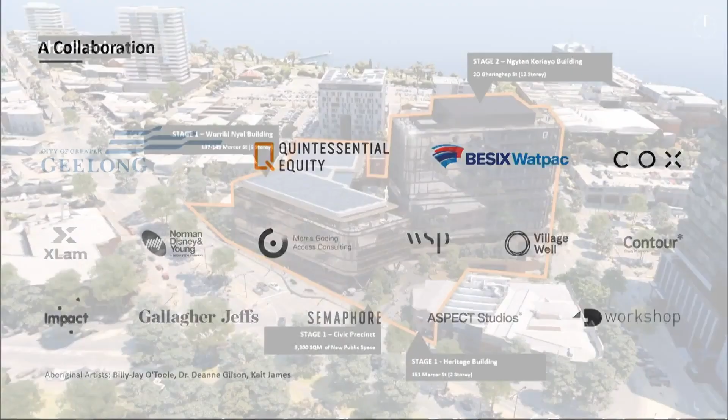The precinct is a collection of 3 buildings and public space in between. We have a 2-storey heritage building restored to its original footprint. We have the Wurriki Nyal building, which is 6 storeys that houses the council offices, and a 12-storey commercial building which frames the precinct and addresses some of the neighbouring developments to the north.

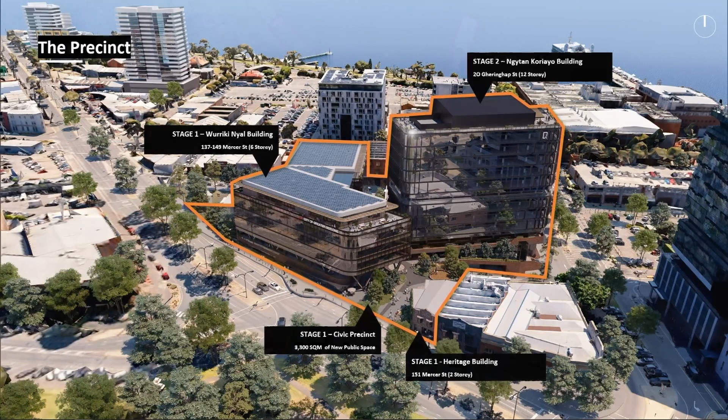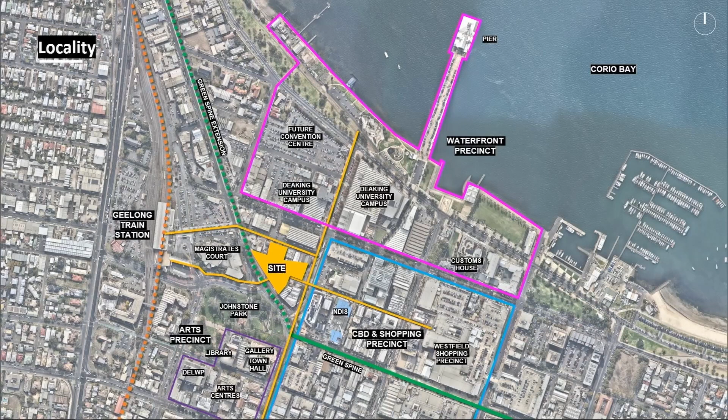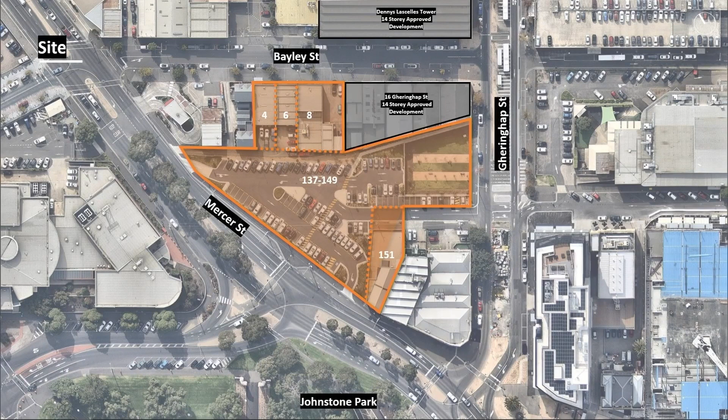The site is located in central Geelong, connecting the train station with the northern waterfront precinct, the eastern CBD shopping precinct, and southern arts precinct. The site has an awkward geometry, both in plan and in section, with 137 the original competition site, with 4, 6 and 8 added to allow a connection to the north to Bayley Street, and 151 added to increase the public realm. Geelong has a rich heritage, which we're able to draw on for inspiration of the design, becoming a key line running through the site.

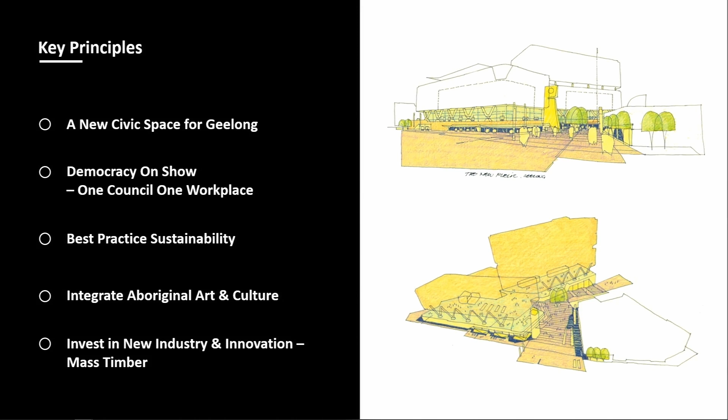5 key driving principles for the design: establish a new civic space for Geelong, amalgamate 7 council offices into 1 building and 1 workplace, employ best practice sustainability befitting of Australia's only UNESCO City of Design, integrate Aboriginal art and culture, and invest in the new mass timber industry.

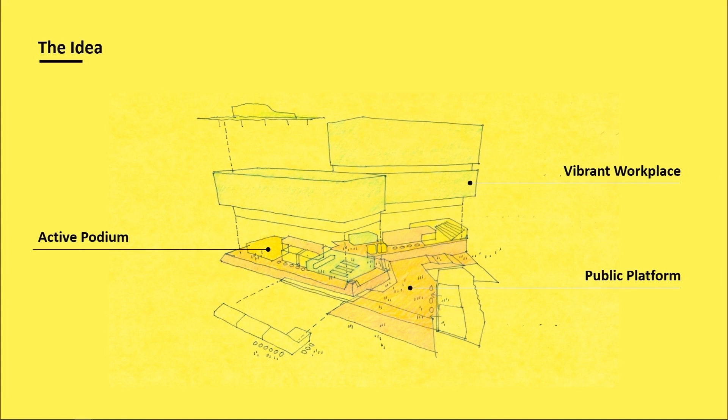The design idea is simple: establish a public platform that's accessible to all, activate that with a podium that can host events, and place the vibrant workplace atop. Stage 1 of the master plan is now complete. It sees the establishment of 151 Mercer Street, the public landscape, and Wurriki Nyal, with stage 2 set to come online in 2024, which is the establishment of the commercial buildings to the east.

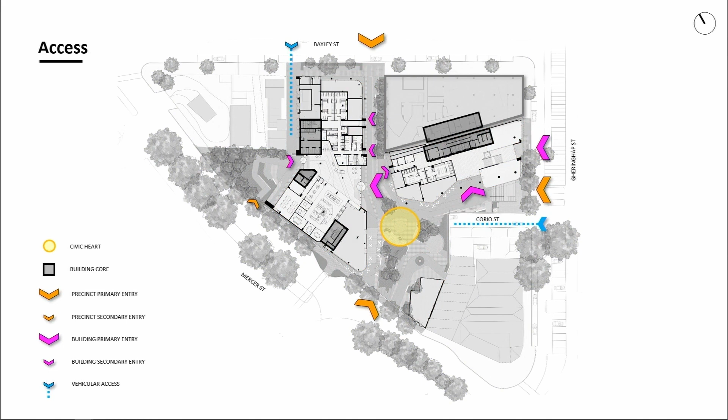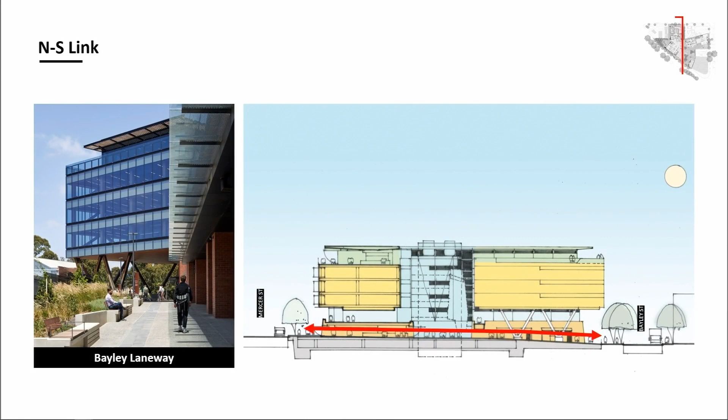The site and buildings have multiple access points with the vehicular and pedestrian movements separated so they don't cross over, with permeability a big consideration for the project, establishing a north-south link through the site with the new Bayley laneway, and an east-west link connecting Corio Street through Wurriki Nyal to Mercer Street beyond.

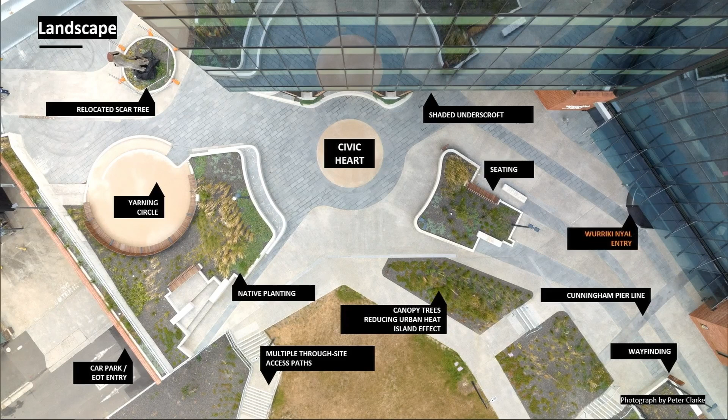The landscape has some notable features such as a relocated Indigenous scar tree, yarning circle, native planting selected by the traditional owners, canopy trees to reduce the heat island effect, shaded undercroft seating areas, and other elements. The council building itself can pretty much be understood in 3 segments. We have the public ground floor, the invited public realm on podium, and the private offices above.

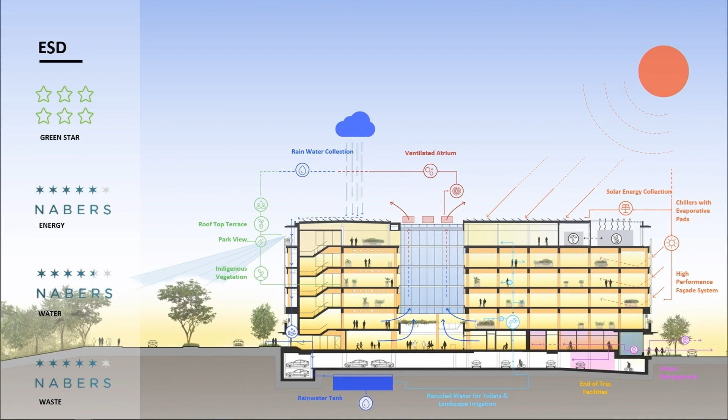It's a 6-star Green Star building with excellent NABERS energy, water and waste ratings, with sustainable features such as solar energy collection and rainwater collection, which is reused throughout the building. The ground floor materiality is of a brick masonry material to reference the heritage buildings of Geelong that made up the site, with the office tower having a high-performance, thermally broken double-glazed facade that skirts around the perimeter of the building.

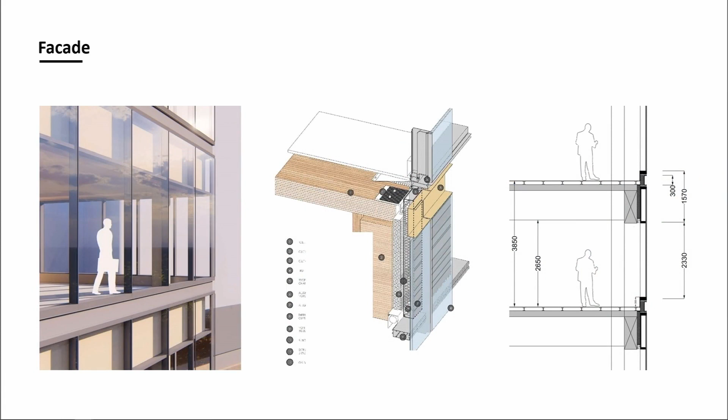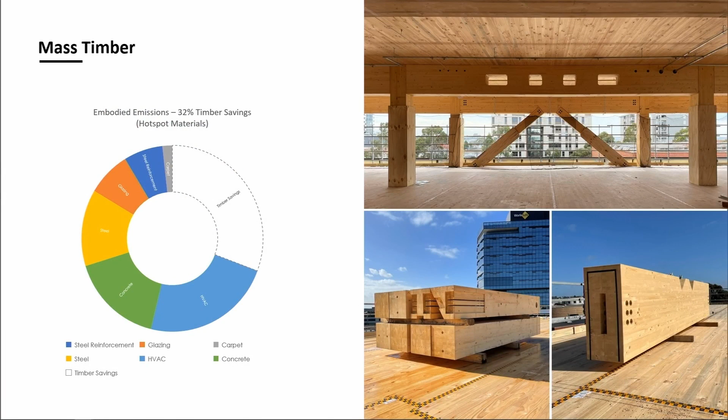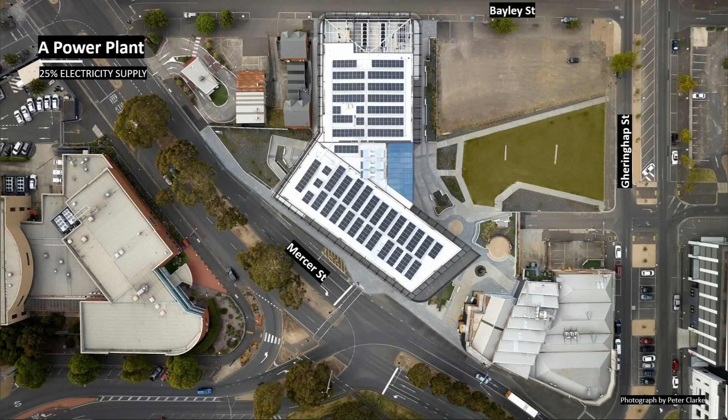The structure is a hybrid structure, with the ground floor and podium being concrete construction, and then mass timber construction up to level 4, and a lightweight steel structure above for the roof. The mass timber allows for about a 1/3 or 32% reduction in embodied emissions of the building, as well as being a sustainable material. Here we can see the skin being overlaid on the mass structure. Large flat roof area allows for a 140 kilowatt solar panel array, which provides for about 25% of the building's electricity supply.

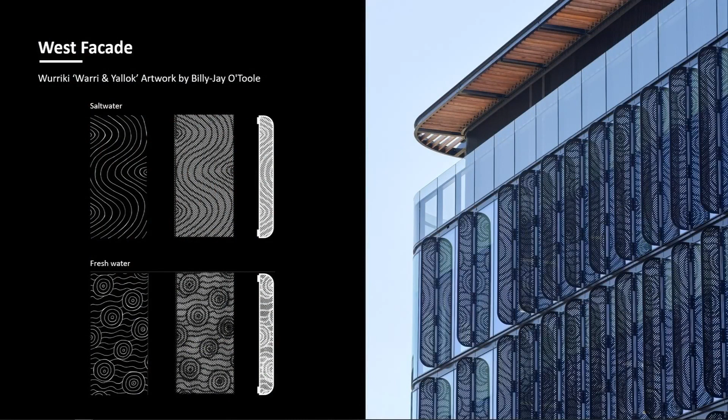So one of the key factors of this building is that it has 3 street frontages. Here we see the southeast Gheringhap Street entry, the southwest Mercer Street arrival, where on the west facade you can see these perforated shade fins with Aboriginal artwork integrated into the design. We have the northern Bayley Street entry, which leads into Bayley Lane, and Wurriki Nyal, which leads to the Civic Heart and to the main entry of the building.

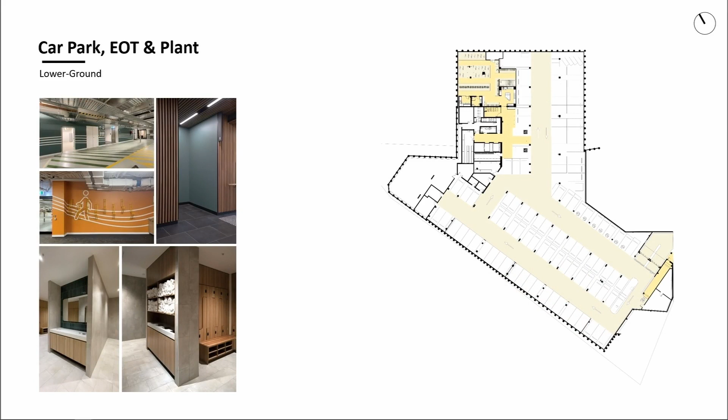Stepping inside the building, we continue that connection with country, with the colours selected by the traditional owners. The basement is host for a car park, plant and end-of-trip facilities, with the ground floor being the public realm and public amenities. You come into a 6-storey atrium, where we continue that exterior brick material through the building and expose the structure, to reference an industrial heritage dematerialisation of the building.

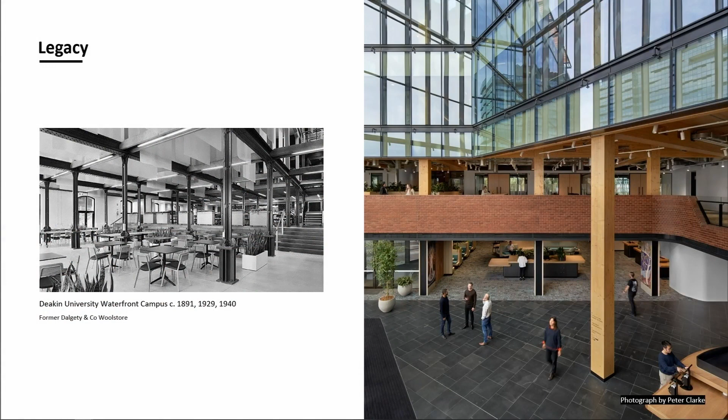Ground floor is also home to the Customer Service Centre, which provides different meeting opportunities to meet with council. And then off the atrium is also the foyer that leads to the levels above. When we get to the podium level, which is the invited public realm, there's a large multi-purpose space, an informal foyer that connects down to the ground floor.

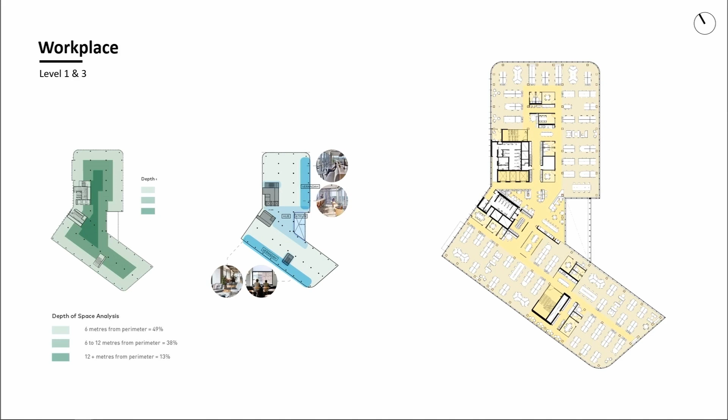We move up to the workplace on levels 1, 2 and 3, and we have the workstations set around the perimeter of the building, maximising access to natural light, and the meeting rooms placed within the centre parts of the building and a core positioned to the west to reduce heat load. To connect the north and south zones of the building, we have a central hub for collaborative working and meeting, which has a tea point on each level.

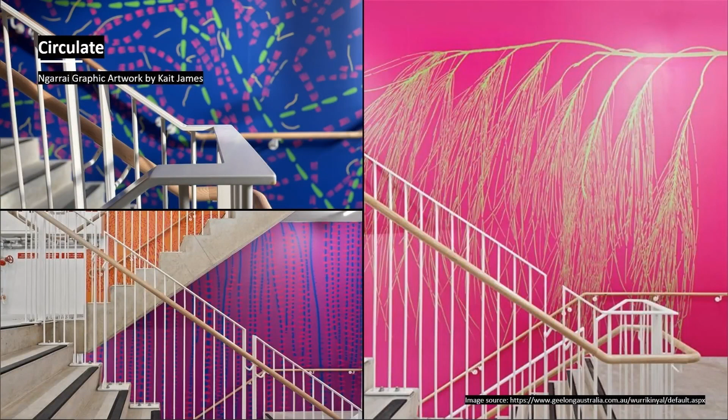We have wide access ways throughout the workplace that lead to an open plan office work floor with views out to the city and park, and breakout areas along the perimeter. The meeting room has a pod language that fits underneath the timber structure and features Aboriginal artwork for privacy decals, which is also repeated in the stairwells going from ground to level 4, connecting all the floors.

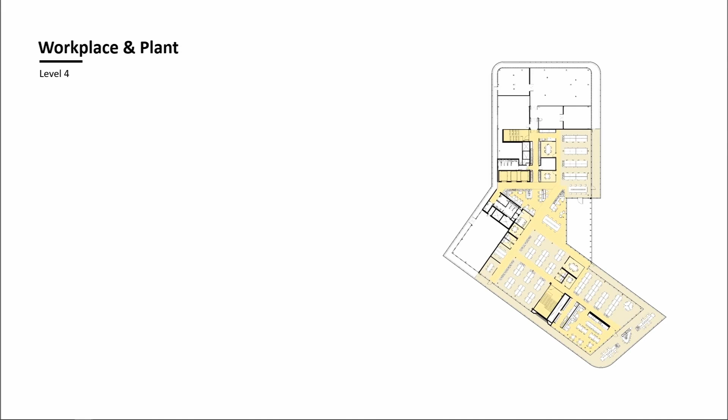Level 4 is a combination of both plant and office, where we continue the timber materiality and expose the structural steel columns, and has a large informal dining space that opens out to a terrace and looks out to the greater city of Geelong.